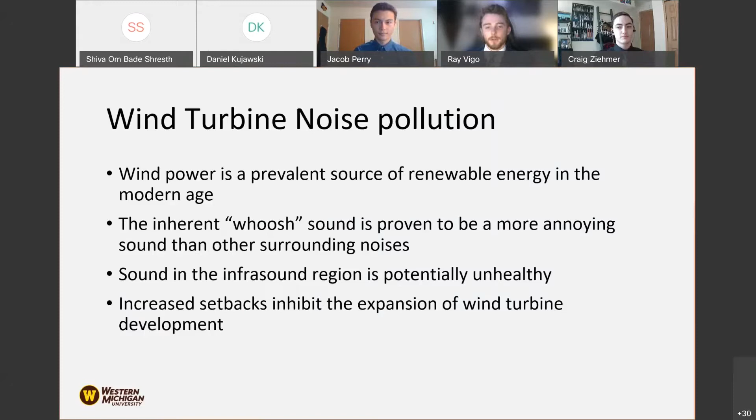This is the reason you don't see these guys in the city. They are usually placed out in rural areas and even in the ocean so that they don't bother anyone nearby. Unfortunately, this limits the expansion of this renewable energy source, and not only are they annoying, but they can potentially be dangerous. The noise generated in the infrasound region, which is 0 to 20 hertz, can cause sleep disturbance and psychological stress. Therefore, the focus of our research will be in this frequency range.

Aeroacoustic noise itself is a product of vortices generated from the trailing edge of an airfoil. This is known as self-noise. When an airfoil is in laminar flow, the air becomes turbulent in the separation region. This is on the upper surface closer to the trailing edge. The air begins to roll up and separate, which forms these vortices. As they shed, they produce pressure fluctuations in the air. When the air fluctuates, transverse waves are formed. This is perceived as noise to humans.

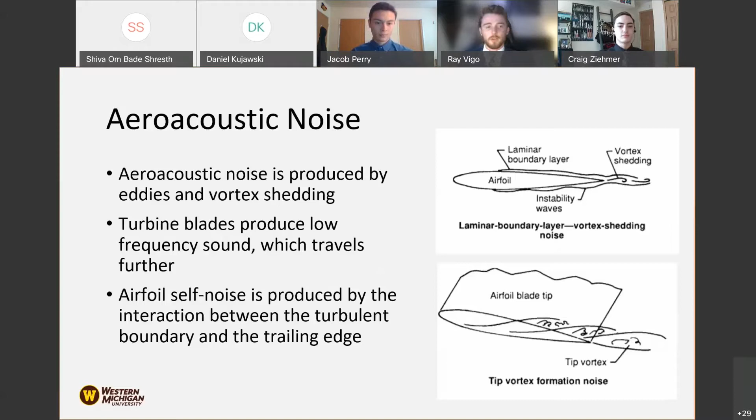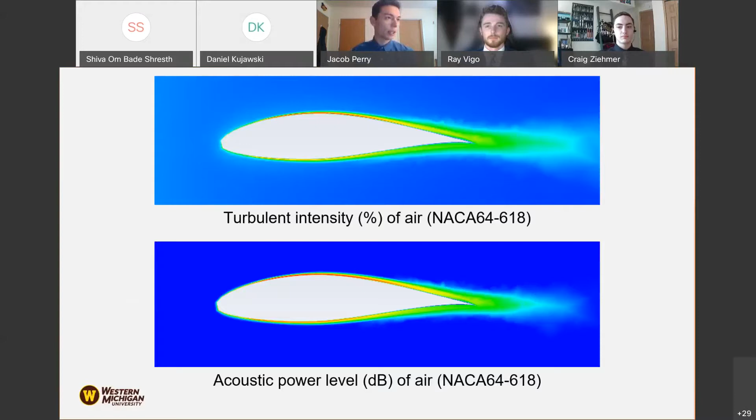This is an illustration of one of our airfoils, the baseline. You can see the correlation between turbulent air in the picture above and the acoustic power level that's generated in the picture below. As you can see from these two, they're pretty similar, so that's why we're focusing on turbulent air.

And as far as the objectives for our specific project, we want to reduce the acoustic power from our baseline, which is the NACA 64-618 airfoil profile. We want to correlate our simulation and experimental values, and we'll do this with a coefficient that we defined. And overall, we want to develop a comprehensive research process for future students. We'll now go over the design alternatives for this project. These are also referred to as NRFs, or noise reducing features.

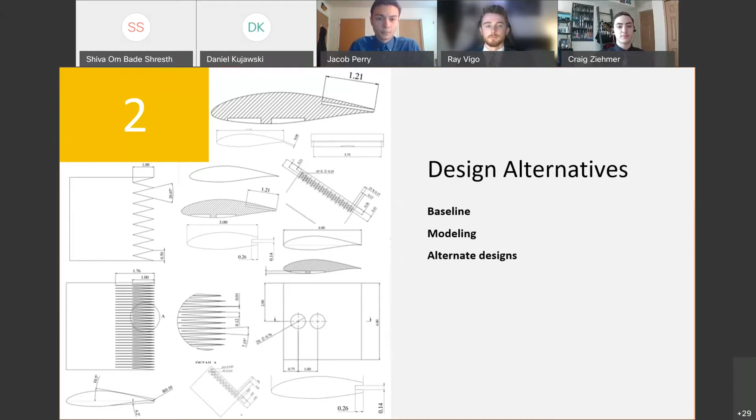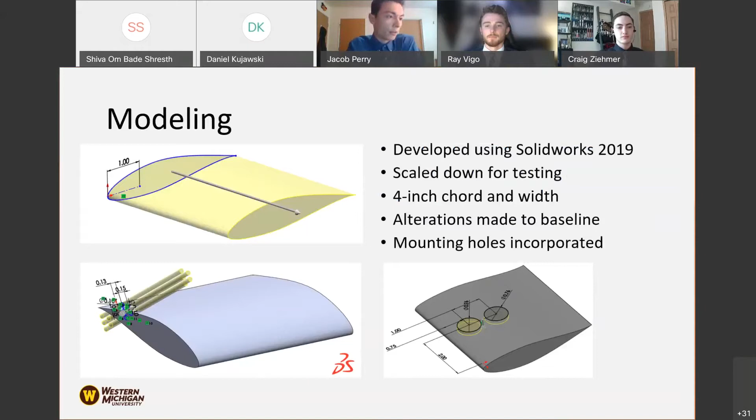So for modeling, we used SOLIDWORKS 2019, and we scaled down our airfoil to a 4-inch chord and width. And all the alterations were made to this baseline. As you can see in the bottom left corner, there are some holes for one of our designs going right through the trailing edge. And we're also able to incorporate a couple holes for mounting our magnets on the bottom of the airfoil.

Now we'll talk about the chosen design alternatives that were developed. The first is the serrated trailing edge. The jagged ends alter the pressure distribution between the upper and lower surfaces before they reach the tip. The dimensions of the serration are outlined in the table with the handy image above it describing how the dimensions were applied.

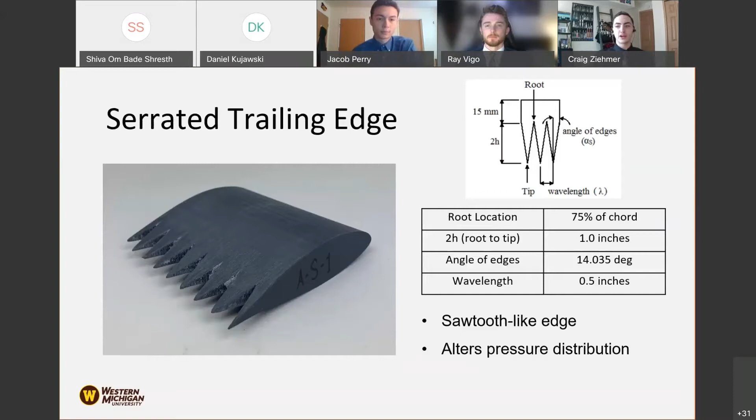The next alternative was based on the wing of an owl. Owls fly silently, so we wanted to mimic some of the characteristics of their wing geometry. The feathers of an owl have tiny little hairs that act as a canopy for air to flow through, reducing some of the boundary layer separation because there is more surface area for the air to come into contact with.

This is mimicked by vertical fins on each of the comb-like fingers at the trailing edge. The comb fingers are based on the fringes located on the end of the wing of the owl and share a similar purpose to the serrated design.

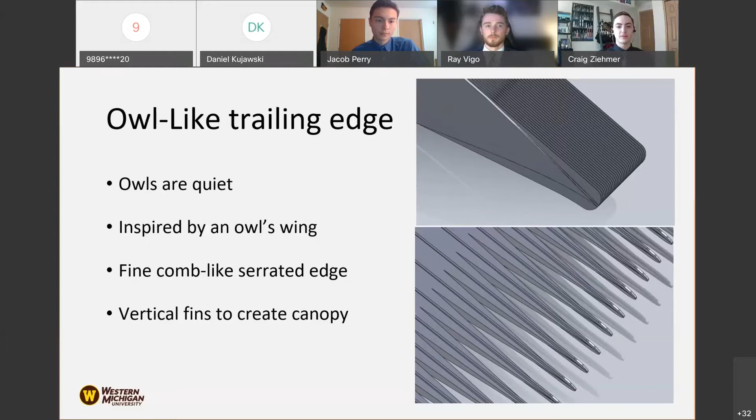So this is our hole mesh design, which is inspired by porous materials. Since we are 3D printing, we were able to just incorporate the holes straight into the body. These holes are focused on the separation layer. That's the reason for them being towards the trailing edge on the upper surface. And the purpose is to disrupt the roll-up characteristics of air as it begins to separate and become turbulent. And it also directs the air downwards towards the lower surface.

We have a couple different versions of this airfoil, one with more holes, so simulating a finer porosity, and one with a few less, so less porosity.

We also tried to implement a porous trailing edge. The purpose behind this model was to utilize a rigid porous material on the trailing edge to reduce air disturbance, and pumice was selected as it's easy to model, it's rigid, and it's also porous. The purpose is to allow the airflow to flow from the high pressure side to the low pressure side through the material.

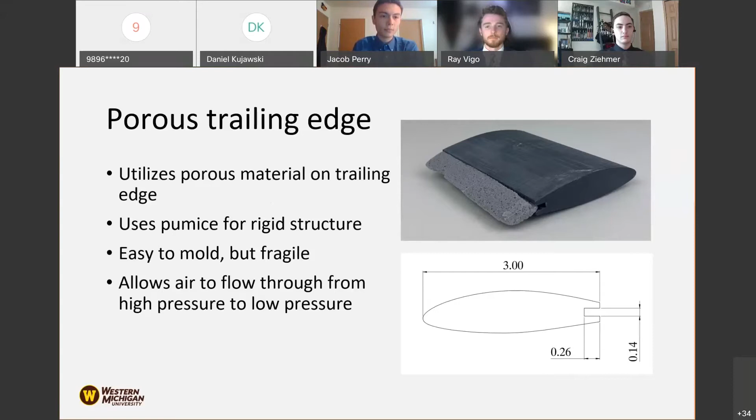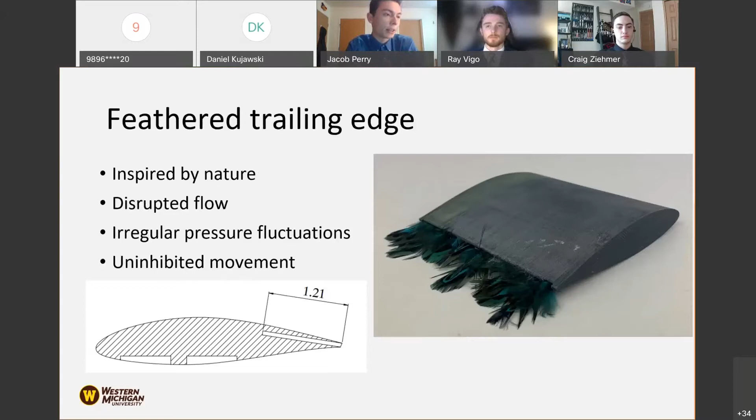And finally, we have a feathered trailing edge, which is directly inspired by nature or an actual bird. And these feathers were inset into the airfoil body itself. And the intention is to, again, disrupt some of the roll-up characteristics and also produce irregular pressure fluctuations, as well as redirect the vortex shedding so it's not all in one direction.

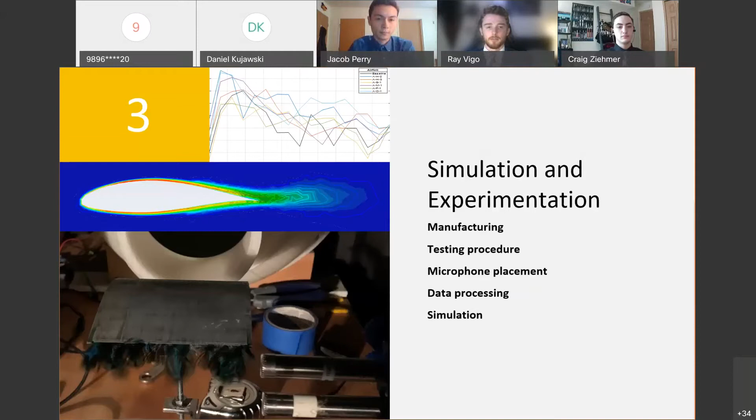Next, we're going to go over the simulation and experimentation. That includes our manufacturing process, the testing procedure, microphone placement, data processing, and the simulation. All the models were printed together on a Stratasys F370 industrial 3D printer. This printer is capable of printing a layer thickness of 1/100th of an inch with a tolerance of 8/1000th of an inch. They were printed in PLA material with an ABS support material.

The models were printed vertically on the print bed to allow for a smoother airfoil surface, and the holes were printed on the bottom surface to insert magnets used to hold the models on the test stand.

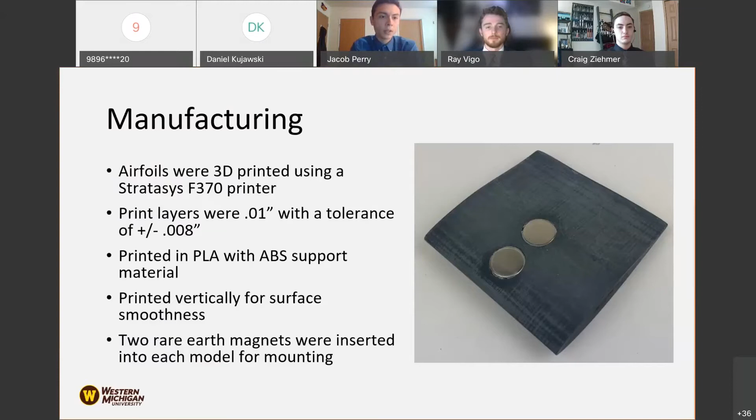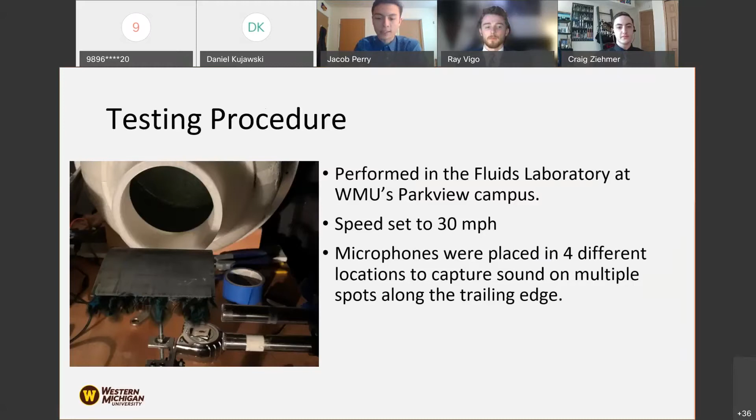For our testing procedure, we did the tests at the Fluids Laboratory in Western's Parkview campus. They have an acoustic chamber with a wind tunnel there. The airfoils were set right in front of the airflow. The speed was set at 30 miles an hour to simulate practical speeds for a wind turbine blade. And we had 4 different microphone placements to capture the sound, which were recorded, and the data was analyzed in MATLAB. The placements of the microphones were determined by a preliminary simulation.

Based on that simulation, a distance of 1 inch from the trailing edge and the horizontal plane was chosen. The vertical placements were located in line with the tip, as well as 1/2 inch above the tip to pick up on any shedding vortices.

Out of the 2 microphone channels that we used in the experiment, we only ended up analyzing the data for one on channel 1. Channel 2 ended up having locations too far below the trailing edge tip. That wasn't really the focus of our project.

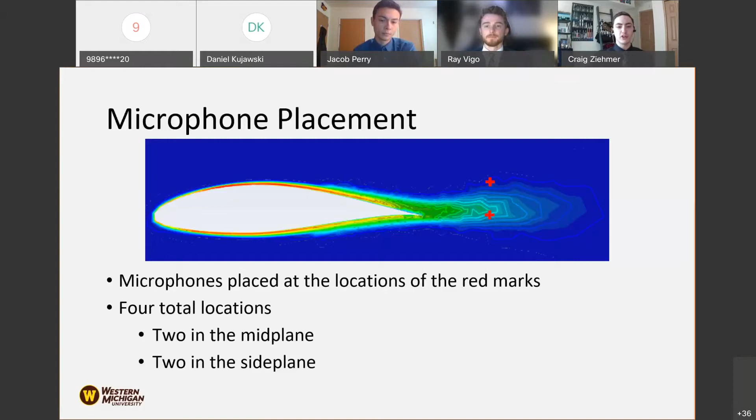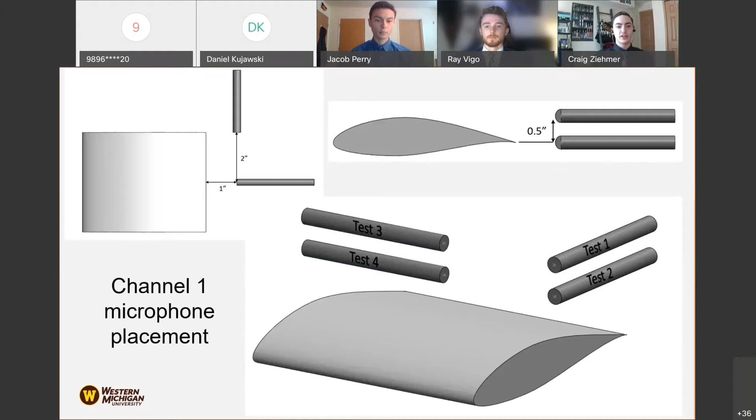The channel 1 microphone was placed in 4 different positions, 2 directly behind the midplane of the trailing edge and 2 off in the side plane. The first test was 1/2 inch above the trailing edge, the second aligned with the tip of the trailing edge, and then tests 3 and 4 followed that same pattern but off to the side.

The next step was to reorganize the workbook so that there was a single file to import from rather than 4. The consolidated workbook consisted of 8 sheets, 1 for the background, 1 for the baseline, and then the other 6 for the NRF designs. With all the numerical data in one file, we could easily import the data into MATLAB for processing.

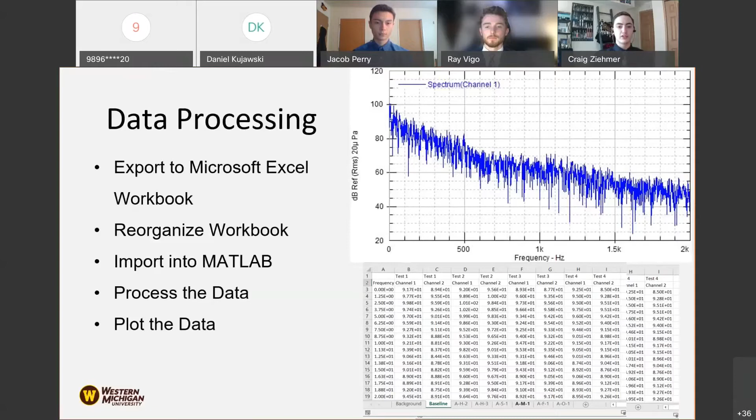Out of the 2000 hertz range that was measured, we only focused on the infrasound that was in the 0 to 20 hertz range. The resulting reduced data resembles a less messy plot, like the plot of the background noise for test 3 shown here. The background noise for each of the tests was then taken and subtracted from each of the airfoils to remove any interfering ambient sounds.

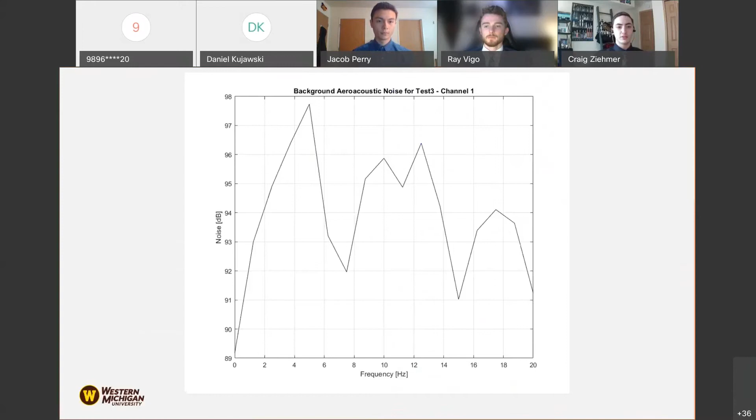These two plots show before and after of the background removal for test number 3 on all the airfoils. As you can see, there's a high concentration of noise below 0 decibels. This implies that the airfoil was quieter than the background, but we believe this is somehow a result of the nature of how the experiment was conducted and the error that can accumulate over time if not careful.

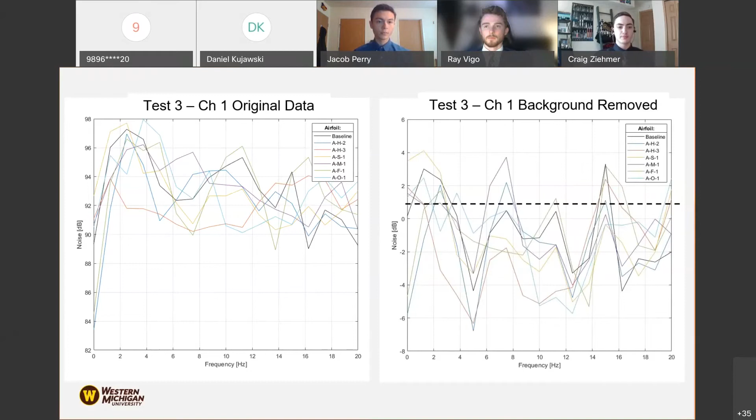So in addition to our physical experiments, we simulated most of the airfoils in ANSYS Fluent. A lot of them were too complex, such as the porous trailing edge and the feathers, and the owl trailing edge couldn't be simulated, but the baseline, the serrated edge, and the hole mesh airfoils were able to be simulated in ANSYS.

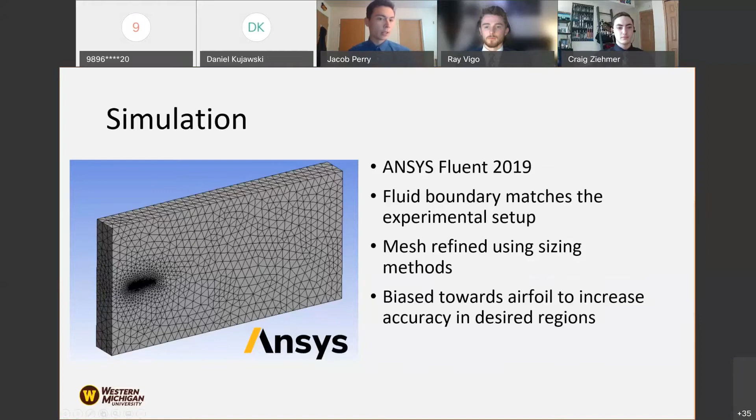For the simulation itself, we used the SST k-omega model as our turbulence model. This is a good model for boundary layer flows, as well as using minimal computational power. We used the broadband acoustic model, which shows the propagation of noise off the airfoil without any background noise. We used a pretty small reference acoustic power since we were in a quiet chamber.

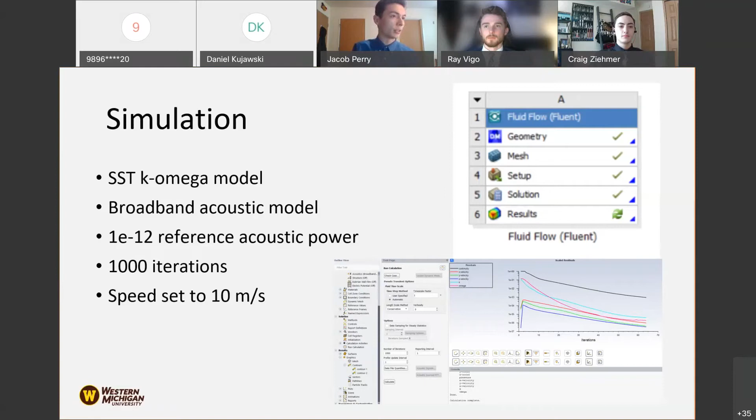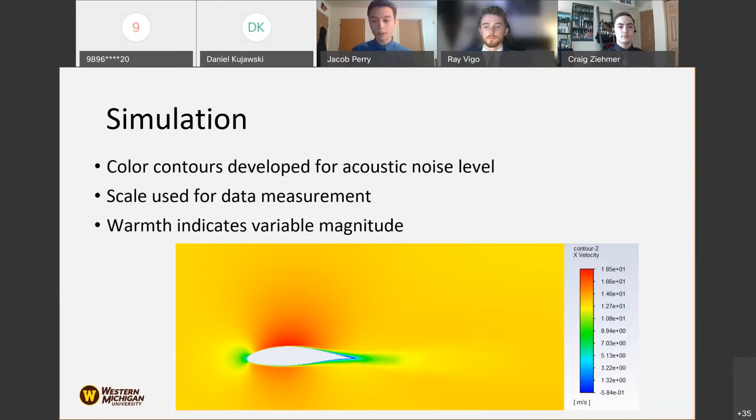But for us, we are more focused on the acoustic noise itself. So these are the acoustic power levels for our fine hole mesh. And you can see we have 2 different ones. On the top, there's the right side contour. Since we had a couple tests, our microphones were off to the side. And then we had one on the mid plane, which went right across the holes.

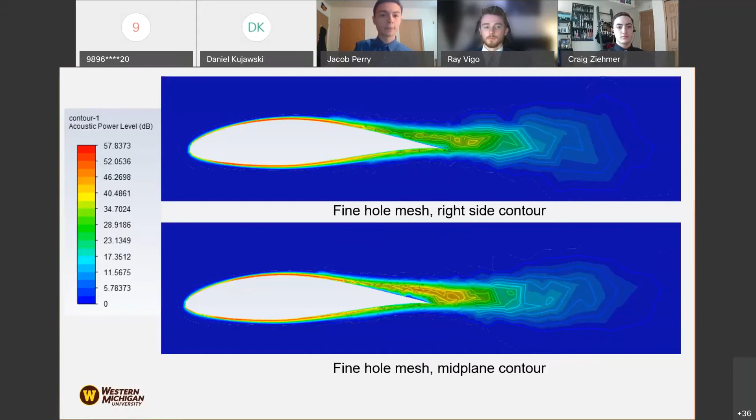As you can see, it's a little bit louder as they go across the holes, but a little farther back, it does get quieter. And we had 2 planes because a lot of our designs were 3D, such as holes, serrations, fins, stuff like that. So we needed to take data points in multiple planes. Now we'll go through the results of our experiment.

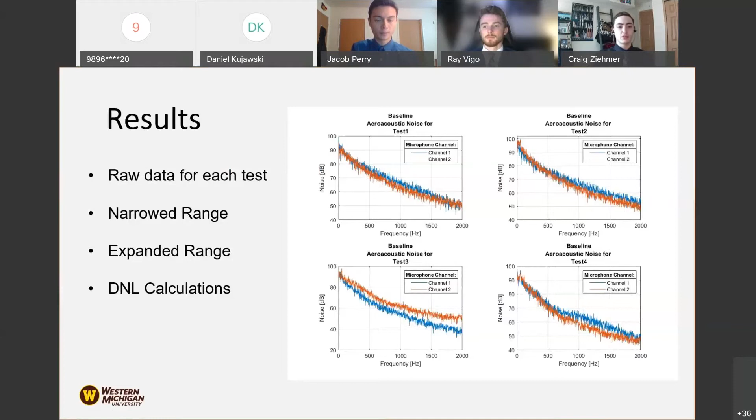The noise data was also analyzed in the narrow infrasound frequency range to gauge whether the NRFs were effective at reducing noise. It's important to also consider how the overall noise was affected in the broader range of frequencies. A frequency range of 0 to 1000 hertz was picked as an expanded low frequency range. As you can see from this plot, the lines start to get a little messy, so it was necessary to look at a simplified numerical method instead.

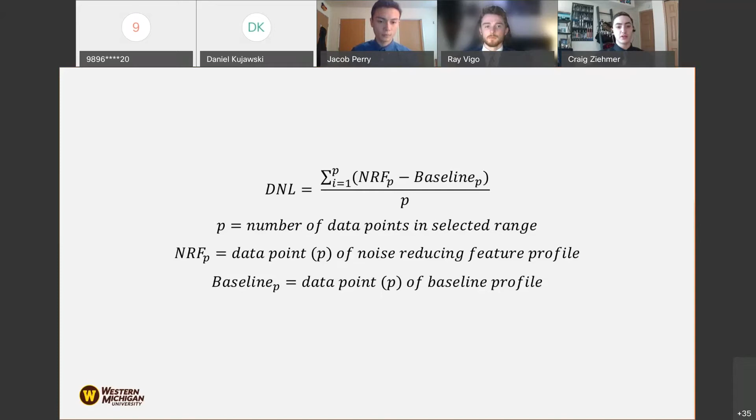To better understand the effects that the alternatives had in comparison with the baseline, a single value of an average difference was calculated. We call this the differential noise level, or DNL. For each of the data points in a range, the baseline noise level is subtracted from the NRF data to give a change in noise levels. A positive number implies an increase in noise over the baseline, while a negative number is a decrease in noise.

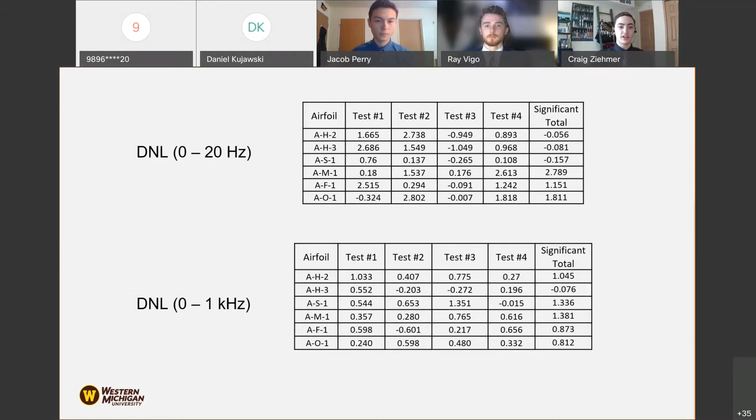The DNL data for each test and range of the frequencies are shown here in the tables. These are the average differences in noise, so it's okay to have a negative number. In fact, that's what we're aiming for. The significant total is the sum of the 2 tests that we deemed a more accurate representation, which would be tests 3 and 4. Tests 1 and 2 were directly in the airflow stream, so there's possibility of interference with the air there.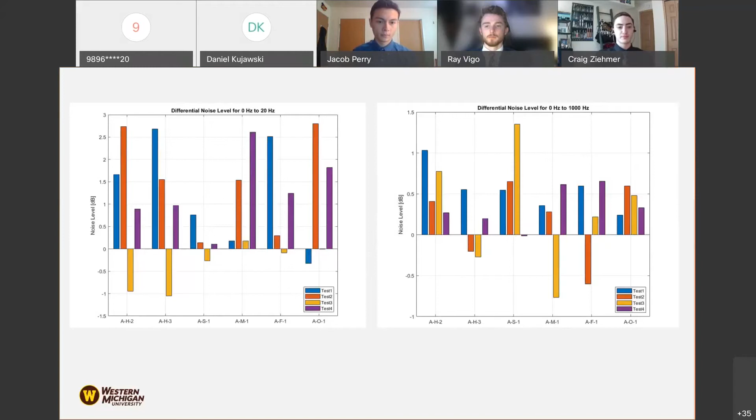The DNL data was plotted on a bar graph to visualize the changes. The ones on the left are the infrasound range, and the ones on the right are the expanded low frequency range. So through our overall analysis compared to our objectives, we can see that the most significant reduction in noise was produced by the fine hole mesh design. As you can see in this table on the bottom, these are our DNLs right here, and the finer hole mesh did have the most significant noise reduction out of all the design alternatives we had.

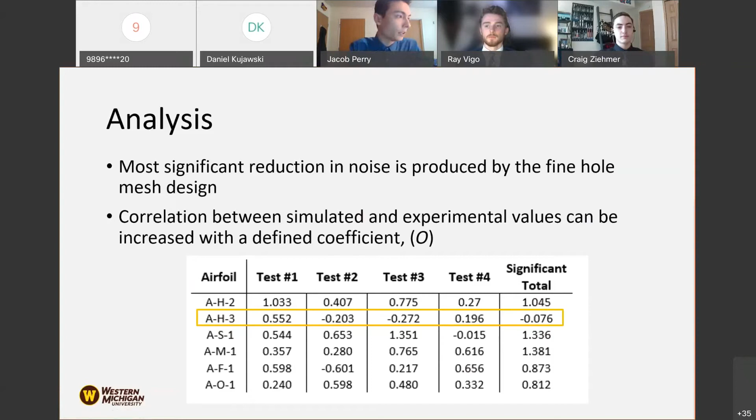As part of our objective, we want to correlate the simulated and experimental values. So through analysis, we do that with a defined coefficient known as the OCAT coefficient. This OCAT coefficient is taken from our simulated and experimental values. It's a sum of the experimental value acoustic power over the simulated acoustic power, and it's an average for all 4 tests. And we do this for the baseline to develop an empirical model for the rest of the simulation so that we have a more accurate prediction for successive tests.

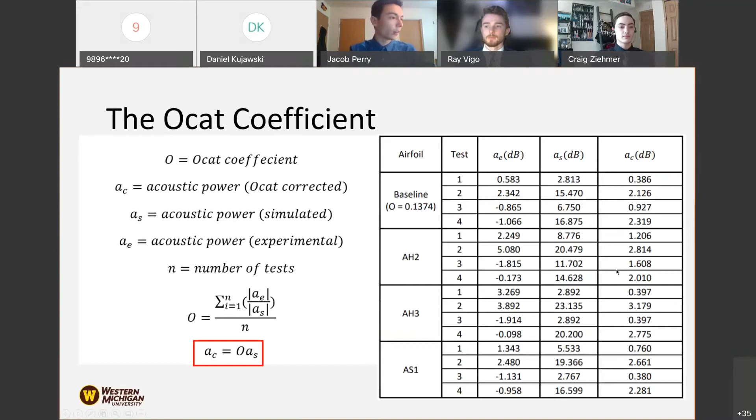As you can see, our OCAT coefficient for the baseline was 0.1374, and this was applied to all our other simulated values for the other airfoils. And this is a lot easier to see on a graph. So all the dark brown lines for each of these charts represents the simulated values for acoustic power level for each test, 1, 2, 3, and 4. And the gold plot line is the actual experimentation value for those same tests.

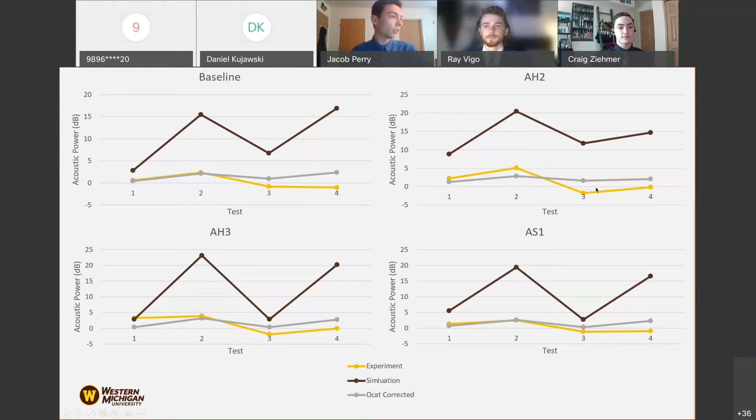As you can see, the trends are very similar. The peaks are in the same place for test 2 and 4. So they do look good, but they are fairly different. So with the OCAT coefficient, this prediction is a little more accurate as represented by the gray line here. You see that for test 2 and test 1, they are very close, rather than the simulation values. And as Craig described, tests 3 and 4 did have some negative values with some error, but the results are still very close with the OCAT coefficient.

4 criteria were considered and weighted in order of importance for the scope of the project. Each of the airfoils were given a score of ±5 in each of the categories relative to how they compared to the baseline. They were scored on how easy and practical it is to simulate the airfoil, whether it is difficult or easy to manufacture them, their overall contribution to reducing noise over a wide frequency, and their contribution to reducing noise in the infrasound range. The noise contribution scores were weighted using the results of the DNL values.

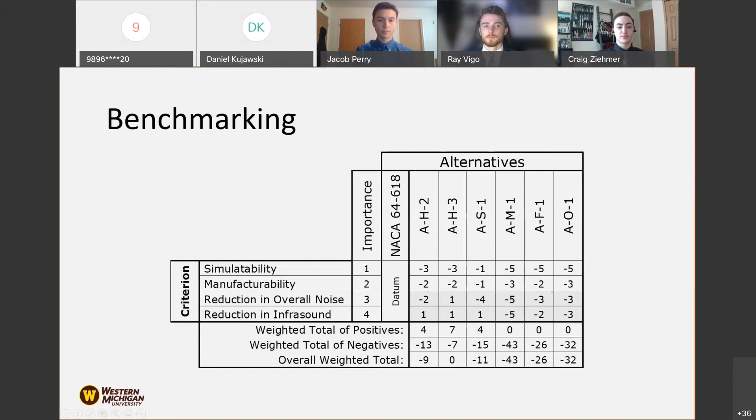So our overall conclusions with our objectives to reduce the noise off of the NACA 64-618 profile: the hole mesh design was the most successful alternative in decreasing that aerodynamically generated noise. Overall, we did develop a very comprehensive research process for future students, all the way from modeling them in SolidWorks to getting them printed and finally testing them. Other students can use the project that we've developed, look through our report and this presentation, and be able to jump right in and have a good start on that.

And for correlating our experimental and simulated values, we developed that coefficient so that the simulated values would offer a more accurate prediction.

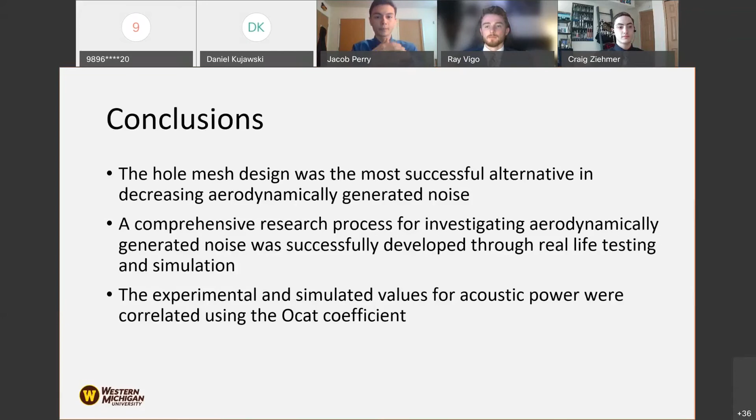Lastly, we have some recommendations for future groups that decide to follow the same subject. For one, the airfoil stand was very flimsy, and the small piece that held on the airfoils was also very flimsy. This can be improved on for a sturdier design.

Adding a larger array of microphones could better allow the rate of noise propagation in the longitudinal direction to be collected. The model print quality can be improved on, as 3D printing often results in some surface roughness. Smoother surfaces would result in less surface drag and improve the results.

Lastly, utilizing the Ffowcs Williams and Hawkings acoustic model in ANSYS can increase the accuracy of the simulations. Overall, future research should focus on the reduction of the OCAT coefficient and yield more consistent trends.

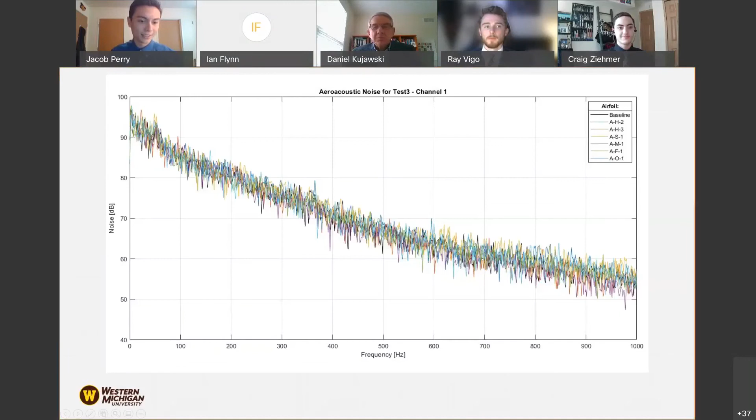Yeah, I got this one. So the wind turbine blades have multiple different airfoil profiles. Usually they're thicker near the hub, and they get thinner as they go down. We had modeled a full length one with all the different airfoil profiles, but since we found in our research that most of the noise comes from near the tip of the blade, we focused on one of the later sections down the span.

Okay, thank you. And if I may ask another question, wouldn't some of the designs that you offered reduce the efficiency of the wings, since there would be less air, and since there would be less wind resistance acting on the fin?

Yeah, so we weren't able to collect lift and drag data because of our test setup. The actual stand was kind of broken there, so we couldn't do that. But in the simulations, a few of them did offer similar lift and drag properties, so you can find that data in the simulations. A few of them did decrease that coefficient a little bit, but a lot of them were similar. So that is definitely something to take into consideration for design.